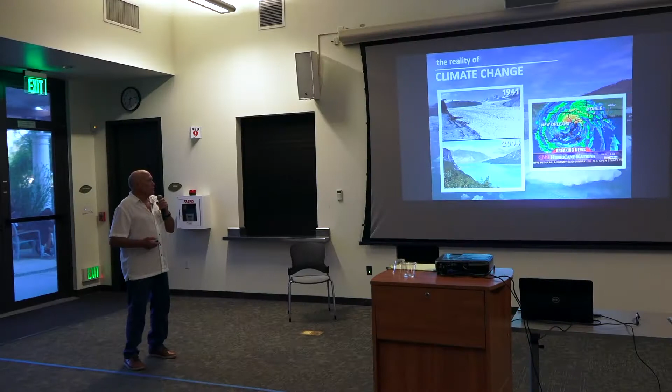Back at Hurricane Katrina, the thing about it wasn't that it blew harder than the others, it was just bigger than the others, bigger across. I can't remember how many hundreds of miles across it was, which had never happened like that before.

So is there anybody here that is a global warming, in denial of global warming, like our president? There isn't any. I didn't think so. But if you come across anybody that is, I have proof for you that you can show them. Because how do you explain this?

That's my humor to the thing here. I saw that in someone's presentation. I got to get that. That's funny.

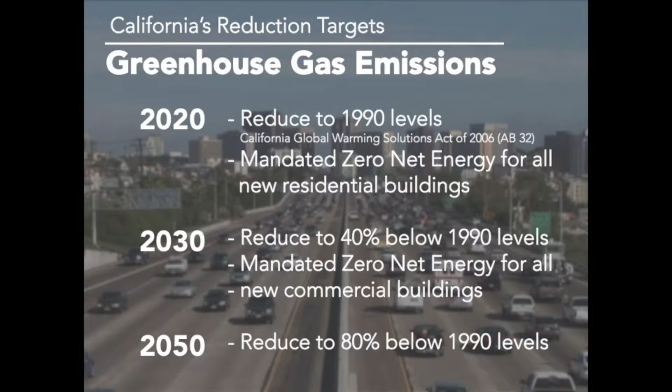Okay, just a little bit about what's going on in California. By 2020, the goal, and these goals were set a while back, reduce to 1990 levels of carbon emissions, and all new homes are supposed to be net zero energy for all new buildings, residential. In 2030, all new commercial buildings are to be 40% below 1990 levels, and by 2050 to reduce down to 80% below 1990 levels. So regardless of what our president does in pulling out of the Paris Agreement, California's going to keep with it.

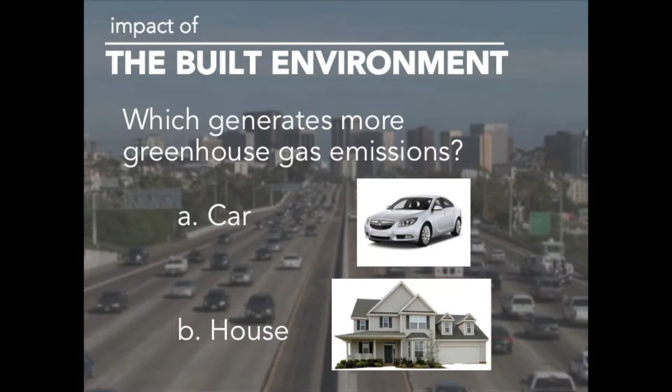I thought this was kind of interesting too. We think of cars, with their exhaust coming out and the smog off the freeways and things, but which gives off more carbon emissions, a car or a house? It turns out one house is about the same as two cars. Pretty interesting. So that's what gets me into the built environment.

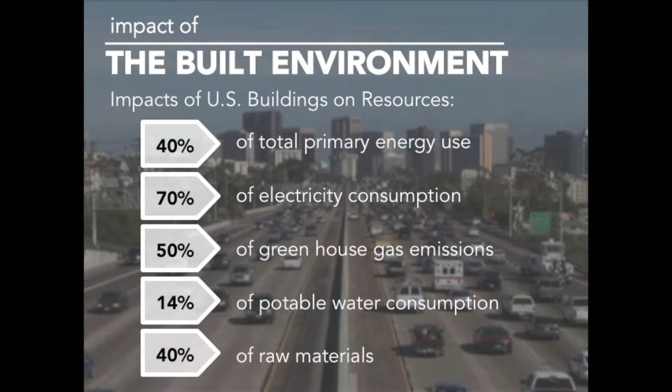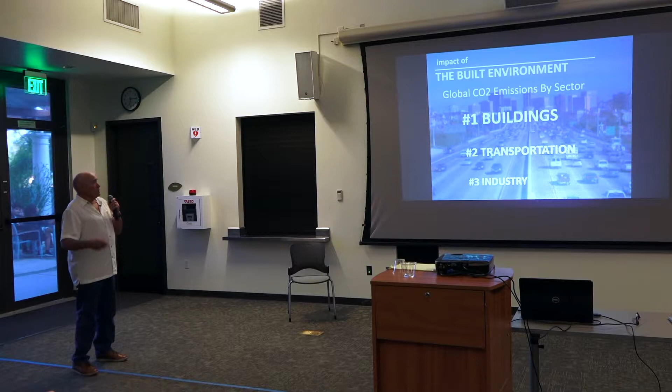U.S. buildings are 40% of the primary energy, 70% of electricity consumption, and 50% of greenhouse gas emissions. So it's pretty important. Buildings are the biggest sector. You'd think of transportation and industry, but it's actually buildings. And of buildings, residential is more than half. This is the vast majority of the buildings that goes on.

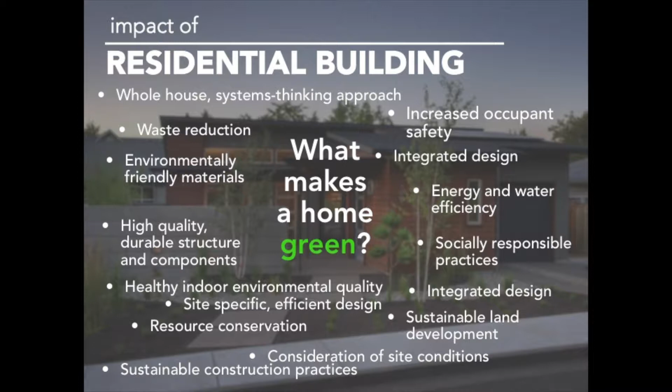So in studying green, I'd hear all this stuff, VOCs and HRVs and dual flush toilets, and all this stuff was kind of jumbling around in my head until one day I listened to a guy talk about LEED and how to get LEED accreditation, the training for LEED. And he held up a prop. You can't see this very well, but that is site, water, energy, indoor air quality, and materials.

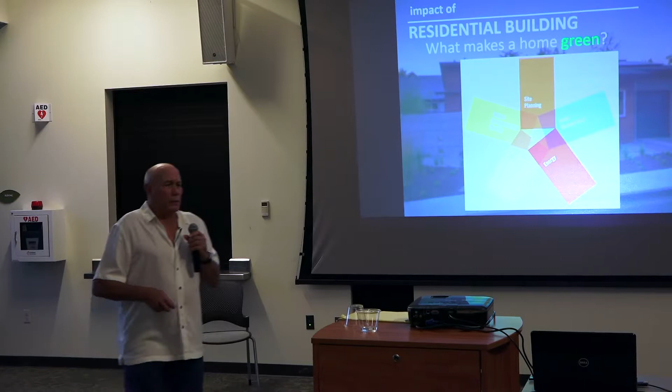And the way he explained it, I'm going to put this down a minute. I'm going to set it right here. So, okay, you're going to have a site. You're going to put a house on the site. So everything that's green falls into these 5 categories. You have site, you have the house, where you put the house and so forth. This house is going to need water.

Water is a rare commodity in California. And then this house is going to use energy. So you've got site, water, energy. It has to light the house, heat the house, and run appliances. And then indoor air quality inside the house. And lastly is materials - in this case, it's plastic.

I put that last because, in my mind, it's important, but it's the least of those 5 categories. But it's the one you hear the most, because with advertising in products, magazines, and TV, they're always trying to advertise how their product's green. I'm a capitalist, I'm not against capitalism, but that's where you hear recycled content in a countertop and things like that. I get clients in, and that's what they're thinking of right from the start, which motivated me to create this PowerPoint to educate them on what the other aspects are.

So once I heard those 5 categories, everything kind of made sense. Everything you hear falls into those 5 categories, and I want to briefly go through some of the issues in each of the 5, starting with site.

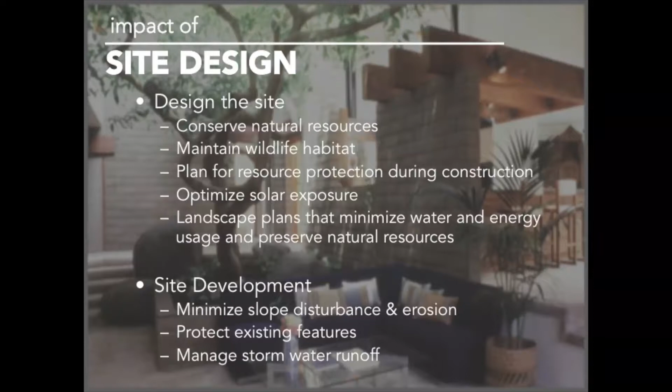Okay, design. Green concepts are to conserve natural resources and maintain the wildlife habitat that's around there. You don't want to make things extinct. What your solar exposure is on the site, things like that.

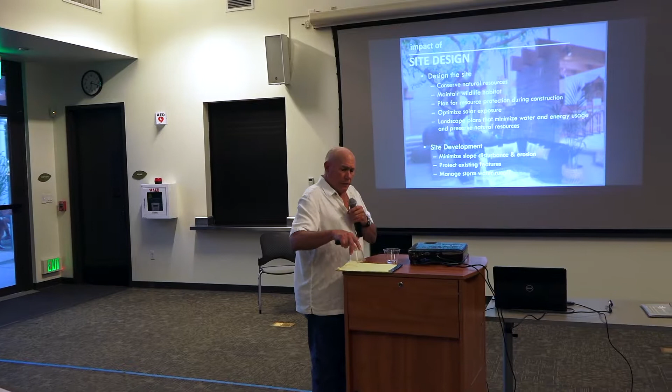In site design, it doesn't cost anything to think about where to orient your house on the lot, and to think about what you're displacing when you put that house on there. So, site development: minimize slope disturbance, protect existing features, and manage stormwater runoff.

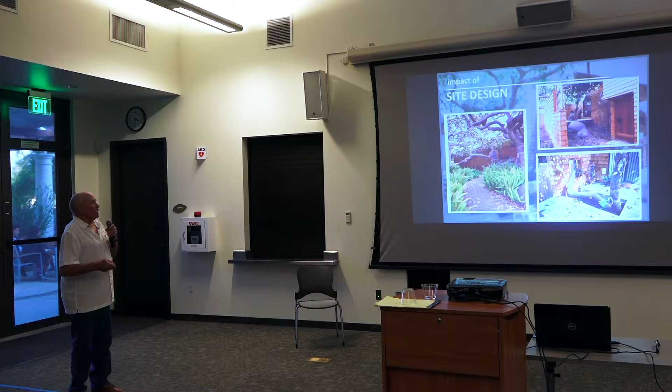This same house was actually on a quarter-acre lot with avocado trees. It used to be an avocado grove, and the trees were planted maybe 20 feet apart in a pattern. We did everything we could to keep the avocado trees. There were just a few that weren't growing very well that we took down, and one of them we actually incorporated inside the house. You can see here how we built decks around them, and for that one there we even built a little wall to let the branch go through, really protecting the environment.

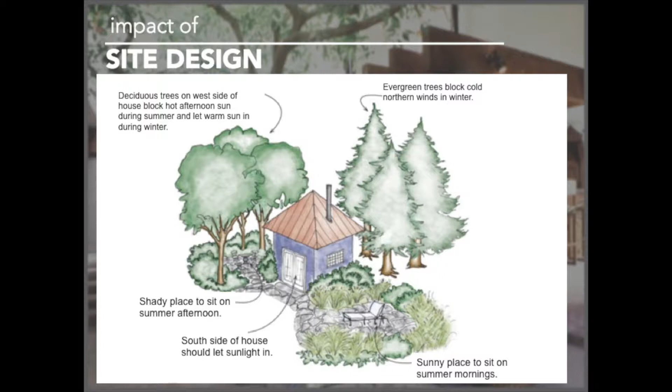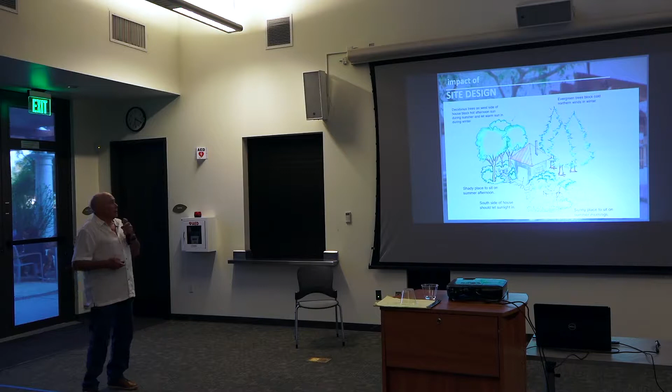This is a nice little sketch. It shows how this house is facing south here, with west sun in the summer. These are deciduous trees, so you get the sun in the winter and shade in the summer - just things to think about. Like here it says, we don't really have this here, but on the north side it could block northern winds in the winter - I think of that more for other states - but this is that same house.

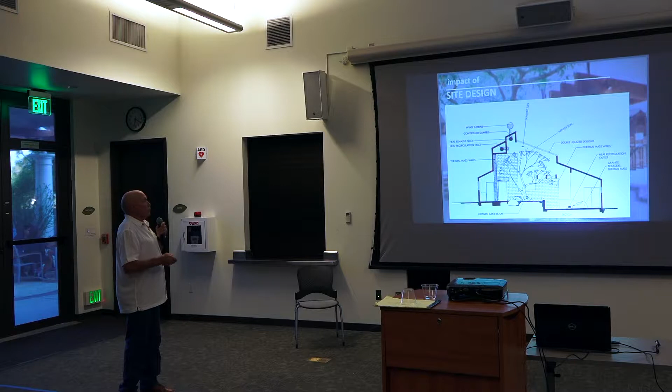You can see the tree that we carried inside. I'll come back to some of these things, but you can see - where's my little red - it's such that in the summer, the sun hits down here, whereas in the winter, when it's lower in the sky, it hits on this thermal mass wall and heats it up. I'll come back to that when we talk about energy. And that's a picture of it - that's the skylight right there.

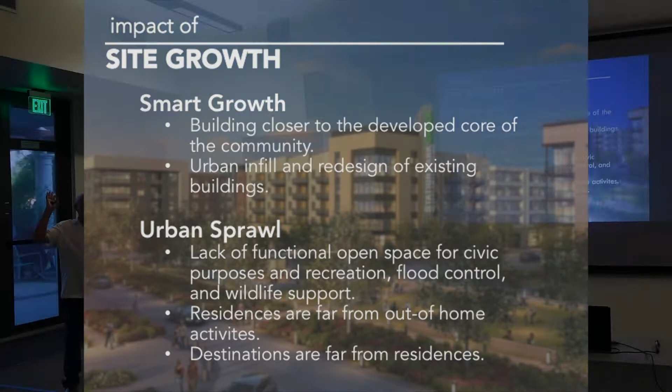Green concepts call for building closer to the cities, where your core community is, instead of urban sprawl - homes and tracts way outside where you have to drive miles to see a theater, go to the grocery store, and so forth. It's just trying to bring it in, with infill lots, versus urban sprawl, which I just talked about - they're far away.

Has anyone heard of the happiness triangle? My daughter actually taught me this. You take 3 things - your home, where you work, and where you play - and connect them into a triangle. In terms of distance, the smaller that triangle, the happier you are. I actually live in Cardiff, close to the Cardiff Community Center, and my office is 5 minutes away, and it is really true.

I like this picture because it shows south is down here, and every one of these homes has a southern-oriented roof to pick up photovoltaic cells. It's not a boring rectangular grid of straight streets. It's pretty interesting, and what you can't see is it has a whole system of pedestrian walkways through it, and walkability is an important thing.

As you can see these things here, it really gives you a sense of community, and it cuts down on gas usage and supports small businesses. So that's part of LEED. Moving on to water: in the 20th century, the world's population tripled, and its use of water grew 6 times.

You can go almost a month without food, and 12 to 14 days without a TV - I made that up for humor. Your body can't survive a week without water. Water covers most of the planet, but just 3% is fresh, and most of that's ice, and most of that's inaccessible. Less than 0.007% is available to drink.

So we can't impact our supply of water. What we can do is change the way we use it, and we do that in 3 ways: indoor water usage efficiency, outdoor for our landscape and so forth, and our wastewater.

So we do a very good job these days with low flush toilets, dual flush toilets, low gallons per minute faucets - they're mandated in California by code. Appliances now, washing machines use about 18 to 20 gallons, they used to use 40 gallons of water. The dishwasher uses 25% of the water it used to use on these new dishwashers.

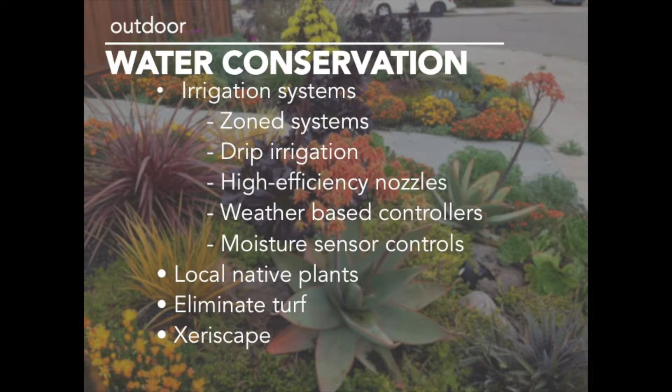But where we're really wasting a lot of water and not conserving it as much as we could is outdoor in our landscaping. But that's changing - all the irrigation companies have come up with really good drip systems that use very little water, and there's types of sprays that use less water. They're doing a really good job with moisture sensing controls so irrigation doesn't come on if it's rained and your soil's already wet.

Local native plants are important because they're used to living here, so they don't need very much water since they lived here before we did. Turf - they do have turf that's pretty low water usage these days, but typically regular lawns use a lot of water. There's places for lawns like parks and recreation for the public, but do we really need lawns out front just to look at them? There's plenty of plants that don't use up all that water that could look just as good. Xeriscape is planting that doesn't require any irrigation - you kind of see it in the background, those succulent kind of plants.

So then water conservation, you've got 3 things. Gray water comes from your showers and washing machine, and you can reuse that for irrigation. Rainwater is what we call the water we collect off the roof - in Ramona out there, we collect that off the roof and use it for the domestic water inside the house. Then the water that hits outside the house on the ground, and all your area drains, you call that stormwater. So you got rainwater, stormwater, and we use that for irrigation.

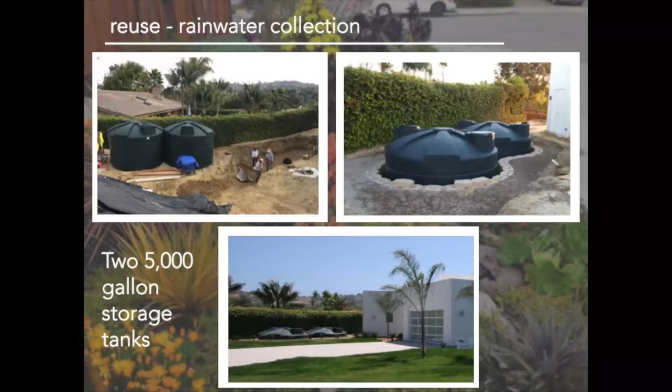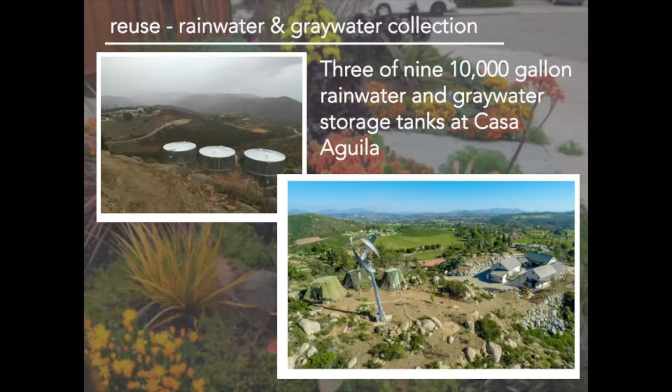There's some water tanks collecting water off the roof - this house had a big flat roof, there's 2 5,000-gallon tanks. We dug these pits and lowered them down so they weren't visually obstructive; the owner wanted to do that for his neighbors. These are out in Ramona - there's 3 sets of tanks here, each 10,000 gallons. You can see we camouflage them here because we put them up there. We actually have 9 of these on the site, and they're bright, shiny metal.

When we put them up there, the sun reflected off and the neighbors came out of the woodwork, all up in arms, so he threw that out. Well, they're now painted, and we've got some pepper trees planted around them to mitigate that.

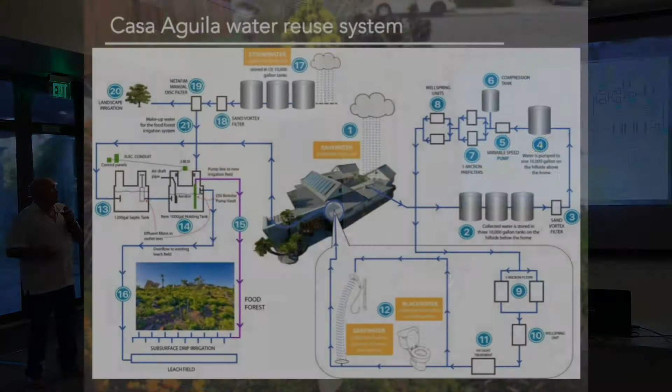This is kind of a complicated thing we put together on what we have out there, but just briefly, what we're trying to represent is the rainwater comes down and hits the roof, and it goes into some storage tanks, and we bring it, treat it, filter it, and bring it back into the house, and it gets used.

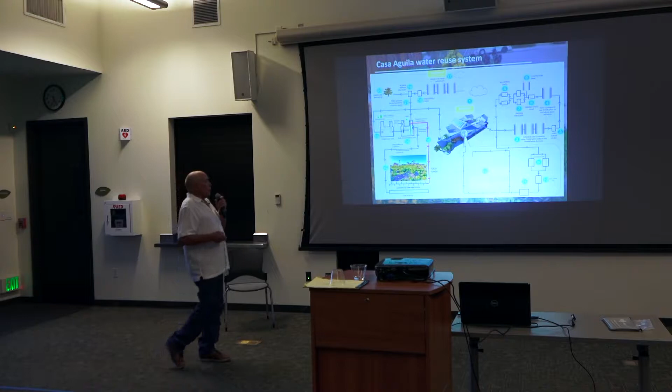You can't see that, but it says rainwater, gray water, and black water. It goes into the house, so it comes out as waste. It's gray and black, and it comes down to a normal septic tank and another one that specially treats it, and we use it to irrigate the food forest out here with fruit trees and other herbs and stuff.

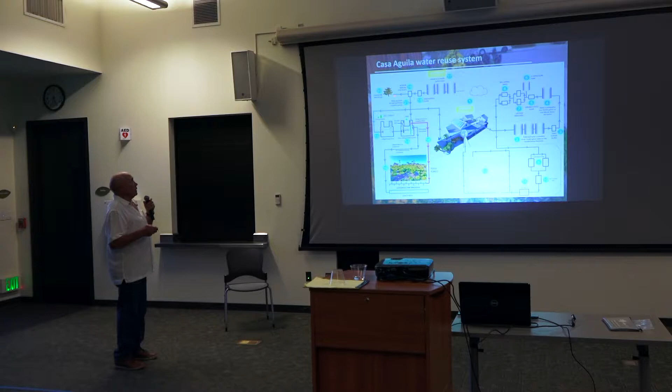And then water that hits the ground, stormwater, gets used to irrigate and also augment that water for the food forest.

Okay, energy is actually, in my opinion, the biggest of the 5 categories. We address energy in 2 ways: one is reducing the amount of energy required, and the other is using renewable resources. You build your house in a way that you don't need as much energy. The cheapest energy out there is the energy you don't need - it's free. And then energy efficiency is decreasing the energy demand.

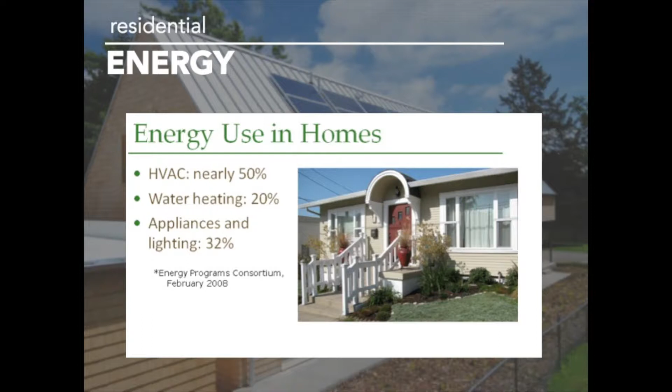Energy in homes, your mechanical is half the energy - that's the big one. Appliances and lighting are 32%, and water heating is about 20%. So this is a really important concept in terms of decreasing the amount.

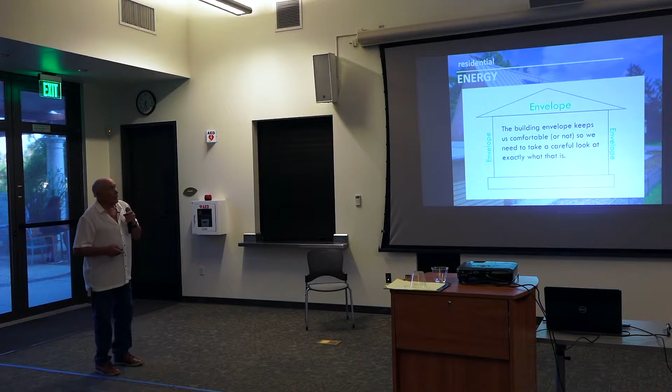Like I said, the big one was HVAC. To reduce your mechanical system and energy for it is really important and very inexpensive to do - pay attention to this envelope. Here's your thermal envelope.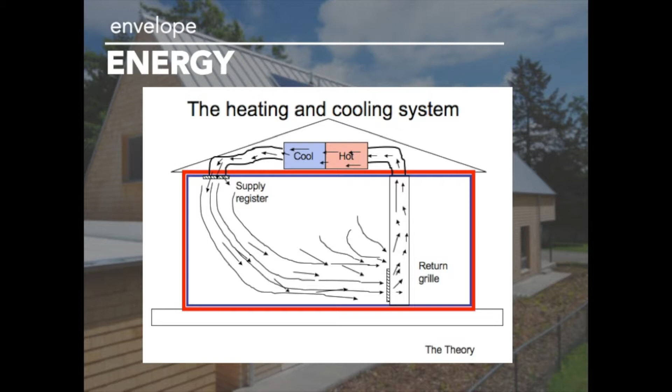And this is a very common house. Got an attic space up here. And we don't do this anymore, but we always put these up in there. It's a nice, convenient place to put it. It's up in the attic, but it's not a conditioned space. I'll get to that later.

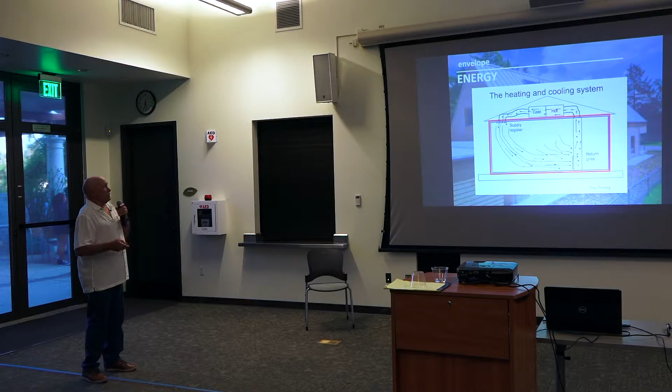So this is how it's supposed to go in theory. But what ends up happening is you have this very leaky house through all sorts of things I'll get into, and it just doesn't work that way. You get duct leakage, you get holes in the envelope, and it's like trying to fill a bathtub with the drain unplugged. In fact, the average house built in the 50s and on up, the average house has duct leakage equivalent to trying to heat your house with one window open. If you can imagine one window completely wide open and you're trying to heat your house in the winter, that's what a typical house has, that much leakage in it.

This is in Ramona, Casa Aguila, and this house here - this is liquid applied membrane, the waterproof membrane. We framed this house like this so that we could do this. This is before the eaves went on. The eaves were made out of SIPS panels - they created the eaves and added insulation up there. But that envelope, think of a balloon - you seal everything tight as a balloon around that thermal envelope.

This is different colors because, while we were putting it up, the product changed colors, so it made for a kind of funny looking building. And we were patching little holes in it.

Passive house, this is a passive house. Passive house has a very strict test on airtightness, and this is our first one. We wanted to make sure we sealed that all up, which we did.

This is - I'll come back to this, this is phase change material. I'll come back to that, but this is showing blown-in cellulose. And what's nice about it is it just gets in so tight, all around pipes and wires, as opposed to fiberglass batts. This is the one I did in Leucadia, a LEED Platinum home.

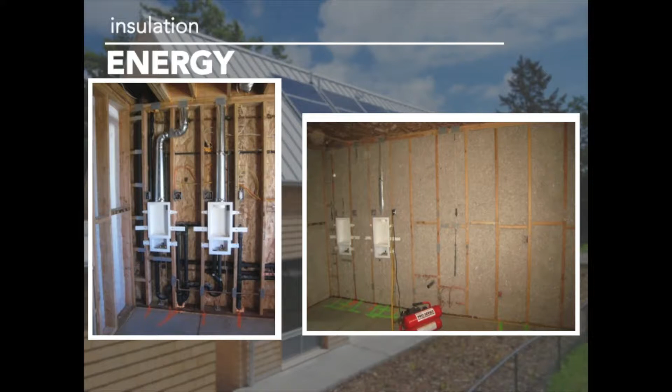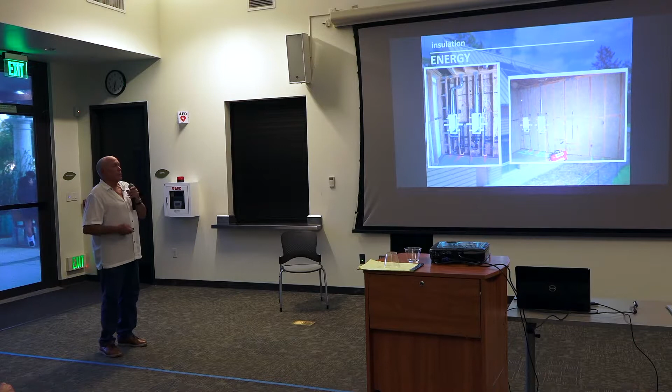This is that she put in, the owner, a double stacked washer and dryer. So there's 2 washers, 2 dryers stacked, and you've got all these vent pipes and all the drain lines. How do you put fiberglass batts and insulate that wall? That's an exterior wall. So we blew in cellulose, and look how tight that is. Technically, cellulose and fiberglass batts have the same R value - the insulating rating is the same on paper, but there's no way it would function the same.

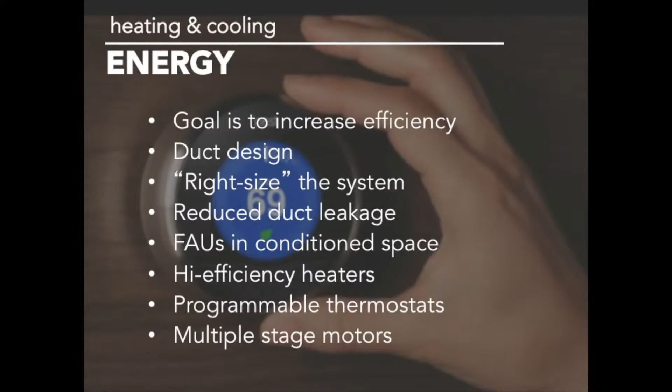So the goal is to increase efficiency for heating and cooling. You want to design your ducts so that you have efficient duct runs, and they're the right size. And you want to reduce leakage - you want to seal your ducts. And we put them in conditioned space, we don't put them up in an unconditioned space.

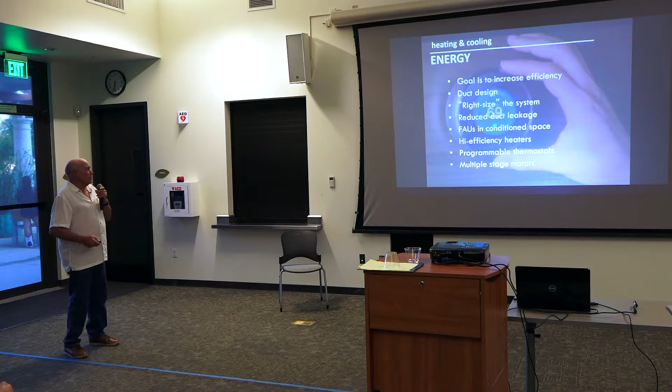You got your duct lines going through a hot attic when you're trying to cool the house with air conditioning - it doesn't make sense. Same thing in a cold winter - you're trying to heat the house and your ducts are running through basically outdoors. And we have multiple stage motors - we got some pretty efficient heaters out there to choose from.

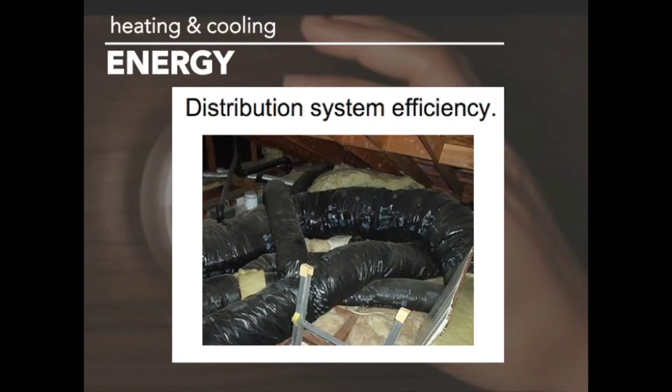This is a way not to do it - you can see there wasn't a lot of planning on that. In fact, one remodel I did for these people's house, I went up in the attic, and one duct had completely separated. So when they turn on their heater, it's just heating the attic on one of the runs.

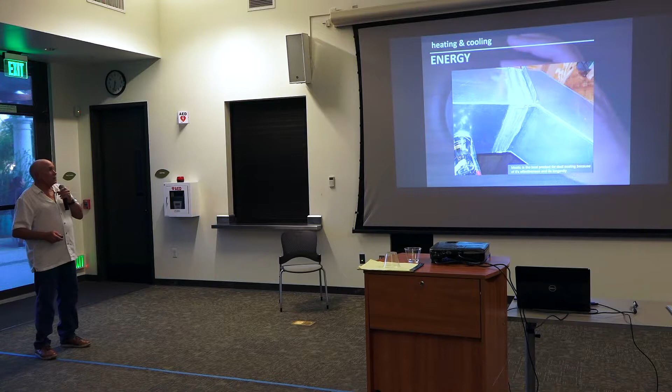It was crazy. Here's showing a good mastic sealing around - that's what you want to do. Nowadays we test the ducts too, to make sure there's a very limited amount of leakage, not over a certain limit.

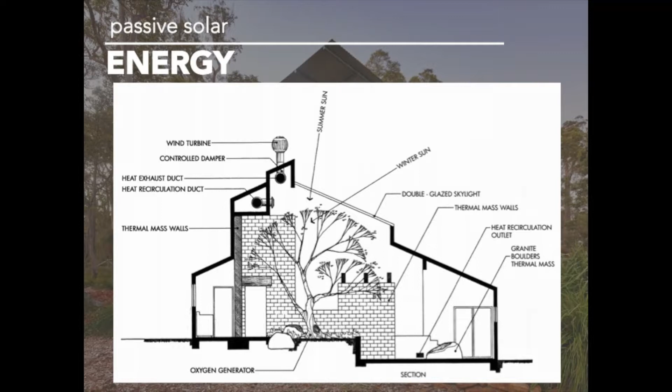So this passive solar, coming back to this - I mentioned this is a thermal block wall, just like this, but right here, the south's over here. And in the winter it comes and hits that wall, warms it up, and then that can release that heat in the evening and at nighttime. But you don't want that in the summer, and it's designed such that it'll hit the tree down here, but it doesn't hit the wall.

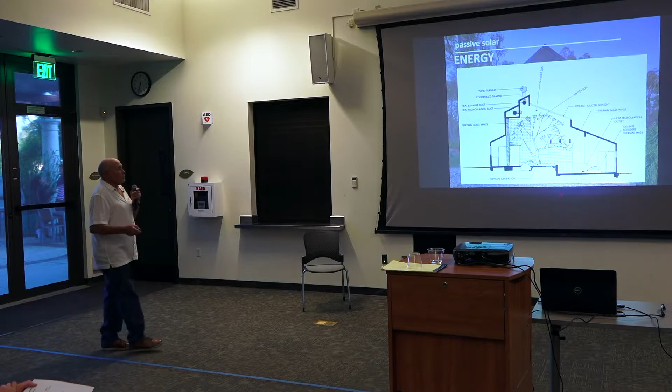I'll show you this - it's also designed, this is a thermal, what do you call it, chimney effect. The hot air in this big room is going to go up here, and when the thermostat calls for heating, the first thing that went on - this was back in 1979 - first thing that went on was a recirc fan. It would take this hot air and recirculate it, and it would blow it out down below, because this is where the humans are - we're not up there, so it would blow it down there.

Then, if that wasn't enough, the furnace would go on. This all kind of had these controls - the furnace would go on. In the summer, when it's hot, you open windows down below and open a damper on this duct, which is this one right up here. And you get this natural chimney effect ventilation, and this little thing turns and you get a little wind - it helps turn it and it draws it.

You get some natural ventilation, and then if that's not enough, at the end of this duct on the exterior was a motorized exhaust fan that sucked that out. So you have your passive, just the natural ventilation, and then a bit of active if that's not enough with mechanical. It was a real low energy motor.

And then also, if it's too hot, we had a mechanical intake. It would blow air into the house from the north side, underneath the avocado trees where it's nice and relatively cool. Right where that intake was, we planted some gardenias, so you get this gardenia smell coming into the house. It's really cool.

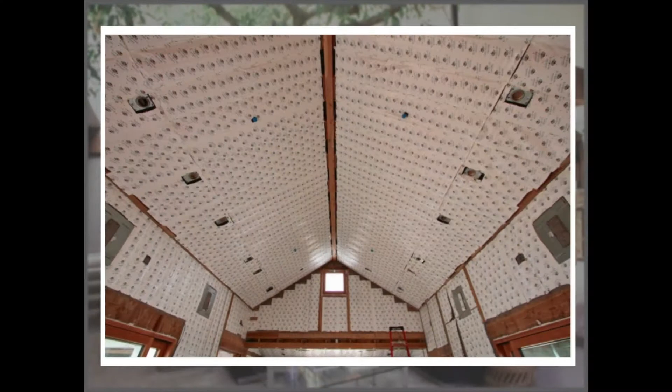And phase change material we came across when we were doing Casa Aguila in Ramona. It just came out—it's little pockets of gel that change. As the house heats up, it'll absorb that heat by changing from a solid, that little non-toxic gel, to a liquid.

And then if the house cools down and calls for heat, at a certain set temperature range—2.5 degrees on each side of a certain temperature, say 75 degrees, 73 degrees, it occurs within about 2.5 degrees on each side of that—it'll change from a liquid to solid, and that releases heat. I'm told it's the equivalent of 19 inches of concrete wall of thermal mass, just those sheets, and they go directly behind the drywall.

So that's kind of like this quote: in the coastal zone—we're not really in the coastal zone here in Fallbrook, but if you're in the coastal zone—95% of your heating and cooling could be met without mechanical systems.

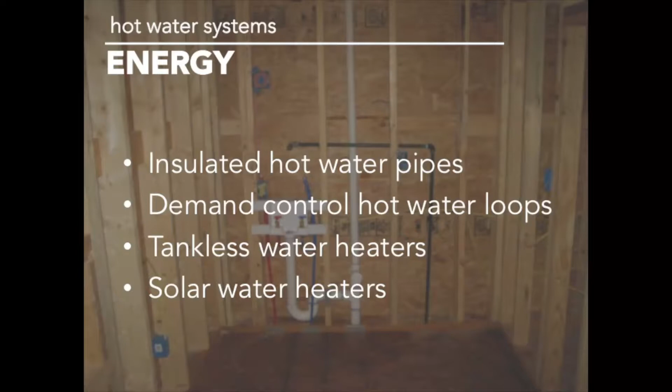Okay, for hot water systems, it's important—it's code now to insulate your hot water pipes. We use recirc lines to have water there, which has to do with water efficiency so you're not wasting water when you turn it on, but they have different controls that manage that recirc. We used to let it recirc 24/7, but it turns out that doesn't work—it wears out your pipes, and it's more energy than you really need.

Tankless water heaters—a regular gas-fired water heater in your garage keeps that water hot all day while you're at work, using energy to keep it hot when it doesn't need to. That's why on-demand, tankless systems help. And then, of course, solar-assisted water heaters. Back in '79, when you said solar, it was all about hot water—we didn't have photovoltaic cells back then.

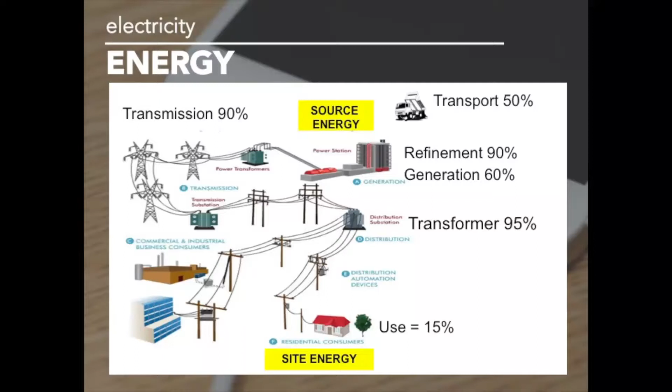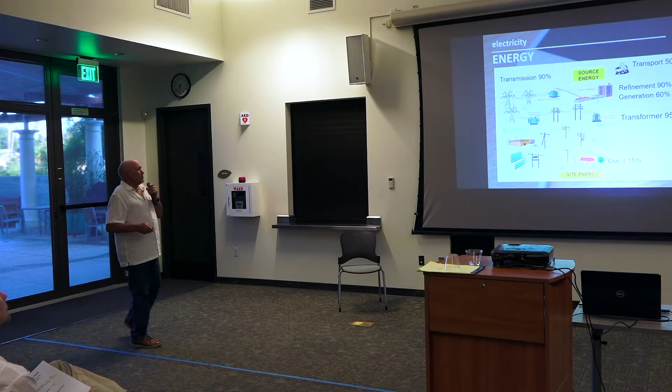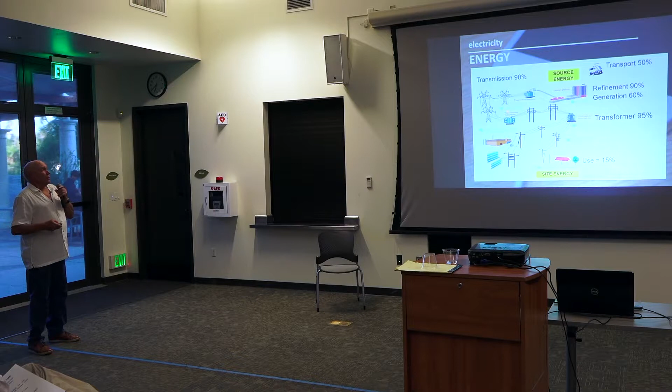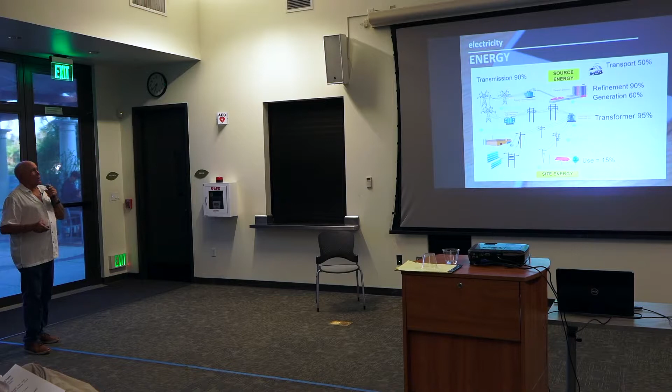Just from here to here, you have about a third of the energy that it took to generate back here. It's kind of depressing, because there's a loss all along the way. There's a loss when you convert it from coal or oil to electricity, loss in the lines, loss in the transformers. But if you think about conserving energy you don't use with a good efficient house, for every unit of energy you don't use here, that's three times that's not needed to be generated back here. So it goes both ways.

So this was some of the ways we conserve. Low volt lighting systems are nice because you can dim them, they're really easy to dim. You can dim it at 85% power and it's not perceptible to the human eye, so you're saving 15% right there.

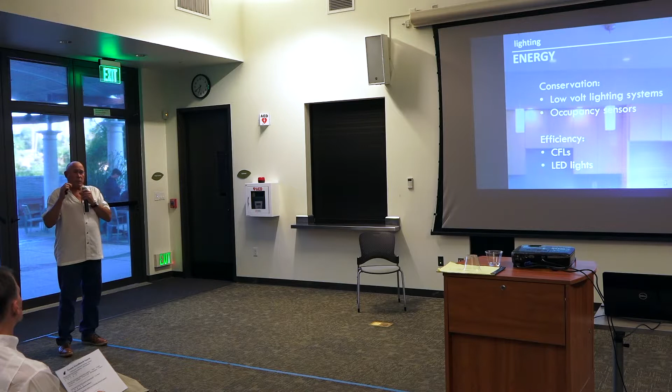This was from years ago when I made this. LED lights were expensive then. Now they're not, they're really inexpensive, and there's no reason not to put them in if you're building a new home. They're extremely energy efficient, and you can tell because when you touch them with your hand, they're cold, they're not hot. Touch a hot incandescent light bulb and you can't even touch it. That heat coming out is the inefficiency.

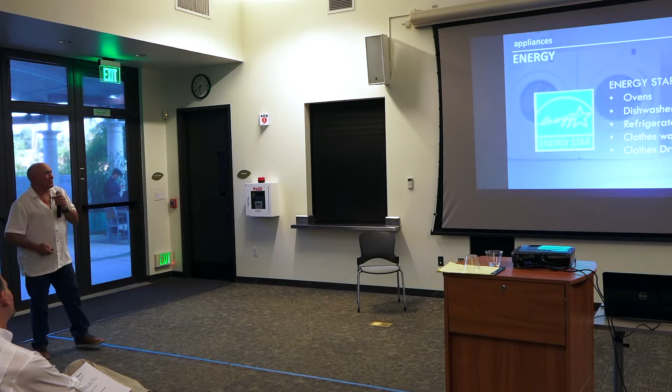Energy Star appliances, I talked about it. Clothes washers use a lot less water, and dishwashers too. The refrigerator is the biggest energy hog of the appliances. Today's Energy Star refrigerator, if you replaced a refrigerator from 1990 with one, I'm told it would save enough energy to provide all the lighting energy for an average house for 4.5 months. But what you don't want to do is what I did way back, put it in the garage as a second refrigerator, because it's still drawing energy. I got this great refrigerator in the kitchen.

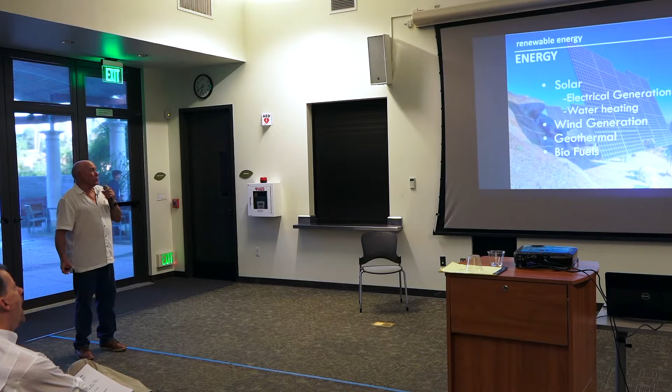Renewable energy, as you know, is photovoltaic and solar hot water and electricity for PV, wind generation, geothermal, where you take advantage of the constant temperature down in the earth, and biofuels like from corn and so forth.

Okay, moving on to materials, the last of the five. How am I doing on time?

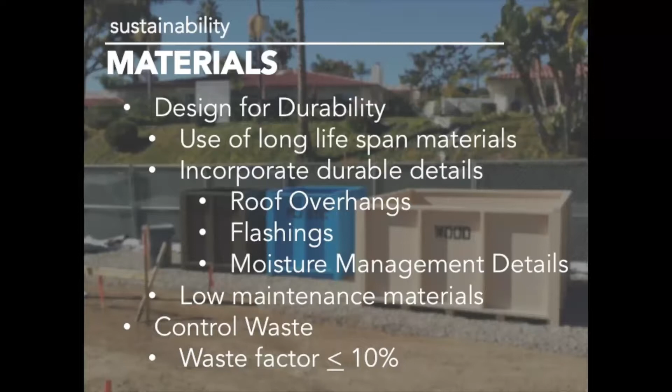So it's important to design for durability. You want products that last a long time, so you don't have as much maintenance cost, it's just better all the way around. There's lots of materials that are real durable these days. And incorporate, there's a reason for roof overhangs. A lot of modern buildings have no overhangs and stuff, but there's a reason for them.

And flashings, it's moisture management, it's really what it's about. Low maintenance materials, and then of course, trying to build in a way that you don't have waste. We used to have piles of lumber waste after you frame the house, but nowadays we plan for that ahead of time with detailed drawings and detailed takeoffs, trying to reduce that waste. So it's all about using less materials.

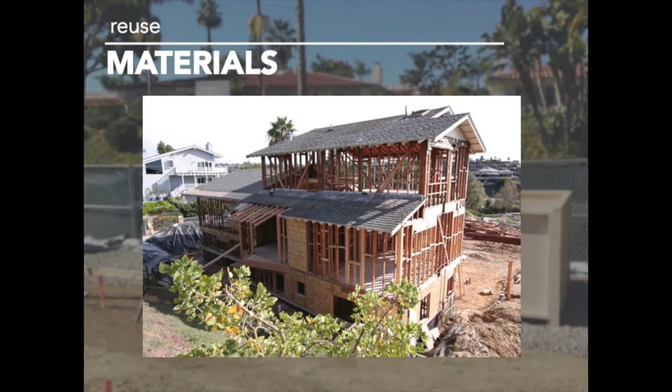You can deconstruct buildings rather than demolish, and reuse salvaged materials. This is a job we did in Encinitas, a gut remodel, took it down to the studs. There are companies out there, the reuse company, they'll come in and give you an appraisal of all the windows and appliances and doors and light fixtures and plumbing fixtures, and they actually give you a tax credit for it. They come in and take it out, and then they reuse it and sell it. In some places, stores have Habitat for Humanity and so forth, and you get tax credits for it too.

So the concept of cradle to cradle - we grew up creating products that go cradle to grave. We take a chair or a lamp, use it in our house, and then it's worn out, its useful life is gone, we'd send it to the dump. So it gets manufactured, it goes from the store to the dump. Nowadays, there are companies that'll come in and design for manufacturers exactly how to do this: design products so that when its useful lifetime is gone, you can recycle the materials that are in it. So that's what cradle to cradle is. Instead of going store to dump, it goes store to recycle to the store again as something else. That's what cradle to cradle is all about.

It's a whole concept. And in this house, these headers we put in are decorative, architectural - these were 6 by 18 clear, solid redwood beams that I had bought years ago in the 70s at a house recycling company that's not there anymore, downtown San Diego. I used to like to browse through it because they had sinks and doors and windows that they'd taken out from homes. And they had just gotten in a pile of about 20 of these big, long beams, and it was all black. They're all black. And they demoed some bridge down in Balboa Park somewhere.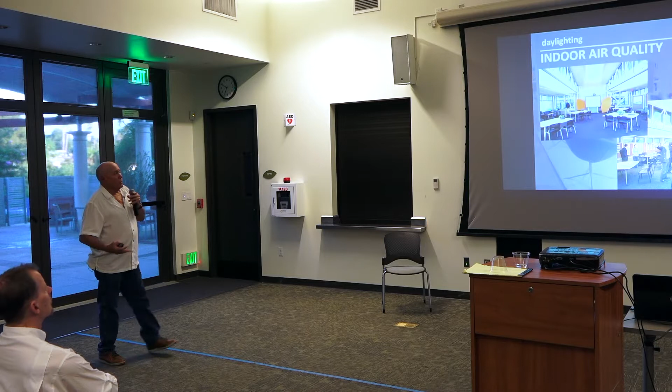So those are the 5 categories: site, water, energy, indoor air quality, and materials. Everything falls into those categories, and once I got that in my head, it really helped me. I hope it helps you understand what green features go into a building.

Green buildings are healthier - you have cleaner air and they're more comfortable to live in. You don't have ups and downs of heating and cooling; it's just a nice, comfortable feeling with fresh air if you ventilate it right. They're also durable so they last longer, with lower maintenance costs and energy efficiency. They don't cost as much to run, and your utility bills can be very little. It's environmentally responsible.

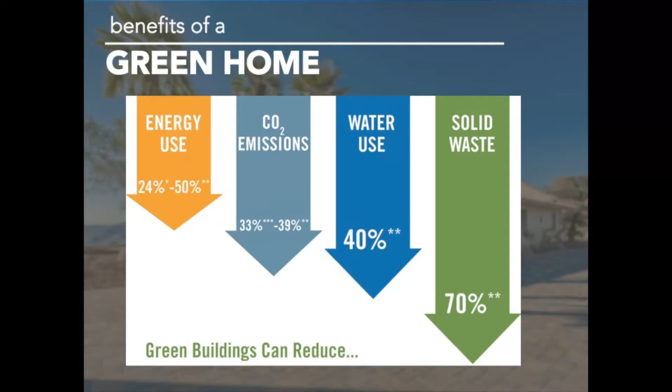The green home cuts energy usage - I think even more than this, but this slide I came across says 24 to 50%. CO2 emissions drop by almost 40%, water use by 40%, and solid waste - that's waste materials when we build it - by 70%.

Let's talk briefly about the rating systems. LEED for Homes - Leadership in Energy and Environmental Design - has a rating system with about 5 different categories, and you get points to grade it along the way. It's run by the United States Green Building Council. It's a national rating system, and around here it's pretty prestigious.

Passive House is LEED a little bit on steroids. Back in the 70s when we had energy efficient measures, America was pretty innovative, and we started coming up with ways to save energy because everyone realized the Middle East was controlling our oil and energy. We came up with a lot of things, but then oil got cheaper again and it went away. In Europe, though, it stayed expensive, so Europe took those principles that started in the United States and built on them, developing this Passive House certification. It started in Germany - it's a way of building and modeling a house that's super insulated, super airtight, and modeled correctly so that you need no mechanical system to heat it, even in the winters of Germany.

And like I said, it's not about chasing points. It's just to deliver a better product. And that's the house of the future. This is a little graph that you don't have to pay attention to, but they have different rating systems according to how many points you get.

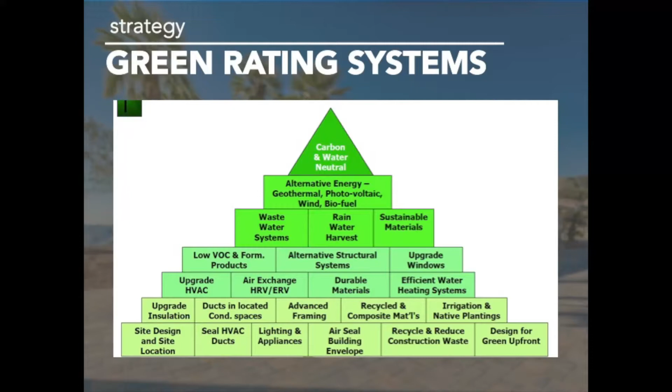Each one costs a little bit more, and some are quite a bit more, but that's when you start doing the high-hanging fruit. These ones just take the low-hanging fruit. That's why we put this together, that you actually need to do the low-hanging fruit first, low-hanging being the inexpensive, easy to do stuff. You don't put an expensive photovoltaic panel on a house that's leaky with inefficient lighting that gobbles up energy. You can make any house net zero by putting a whole bunch of PV, but it doesn't make sense to do that. So you do all the low-hanging fruit first, then go to the others and work your way up. That's kind of how Casa Aguirre ended up doing them all.

So that was the high-hanging fruit. And I like to end with this one, because I really believe it's true: if you build or remodel a home today and it's not built green, it's obsolete the day it's completed.